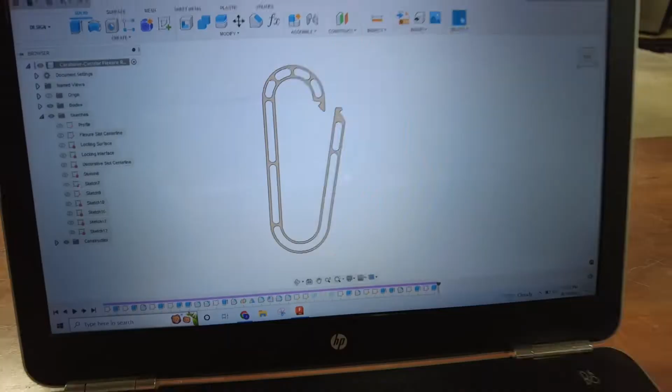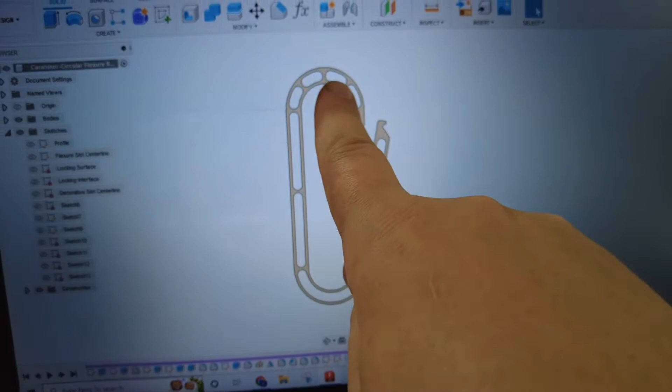And then the big thing is I redesigned my carabiner. So I got rid of the decorative slots that were here and here, and then replaced them with some skeletonization. So now it all kind of has the same design language all the way through. I'm not convinced about the balance. It feels a little top heavy, and I don't know. There might be some little tweaks in the spacing of these. I might take this one and split it into two there, or add a second one down here. I don't know.

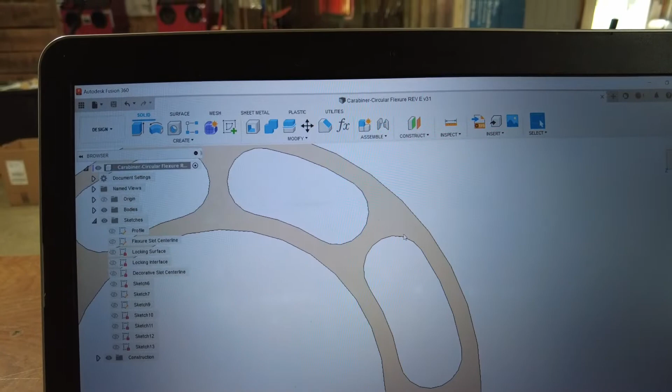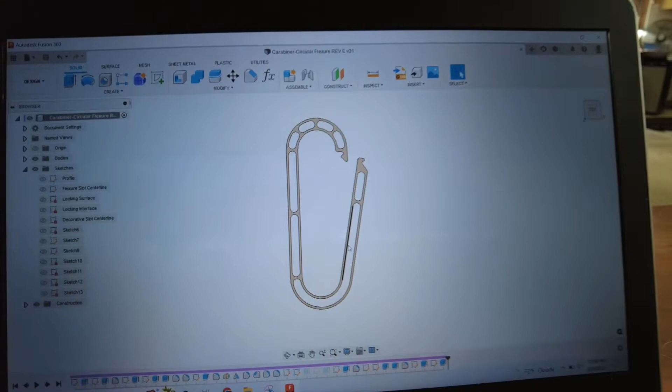But the biggest change is because I don't have that little decorative slot, all of these holes are going all the way through, which means this is now a one operation part, and I don't have to flip it, which is where we were running into a lot of the issues. So I can get twice as many off in one run of the fixture, which is gonna be amazing from a production standpoint. Assuming it works, which the only way to know is to test it. So I guess that's my goal for the rest of today, is to do some actual prototyping.

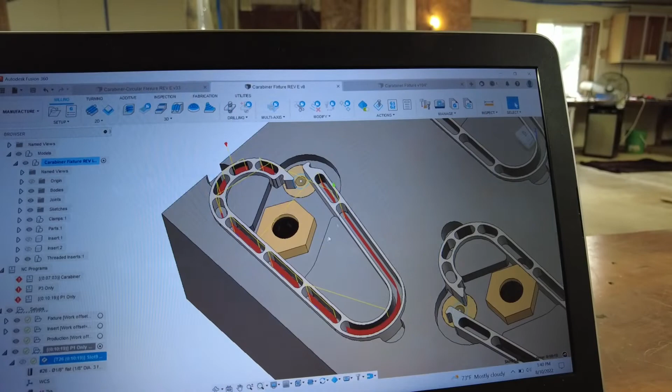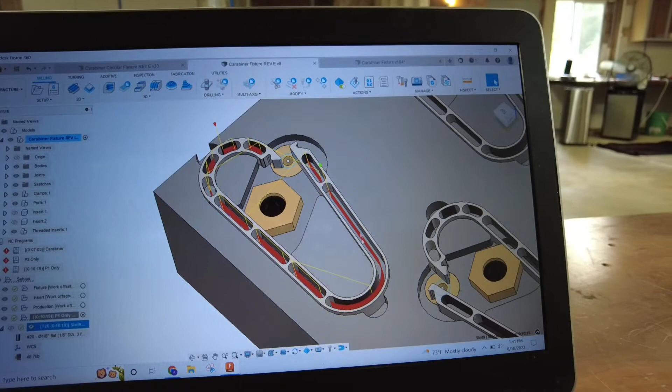I just finished up the CAM for this first operation here—well, the only operation now, since these are one-op parts. Basically it's just a whole lot of titanium slotting. There's nothing fancy going on, and it's exactly one tool path to do this entire part. It's just broken up into all these different slots, but over here on the tree, it's just one tool path to do all of them. I don't know, I'm hoping this will work. I can't predict how the material is going to warp as I cut it, but at least in theory, I like this.

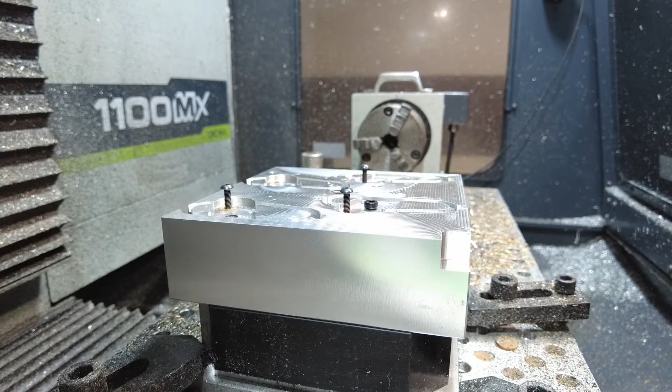So let's just hit go and see if it wants to cut in the right place. If it's trying to cut even remotely closely, then it'll work fine. It'll either be off by a mile or dead on.

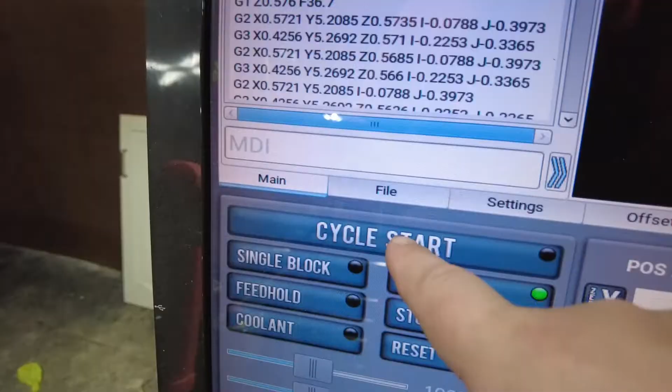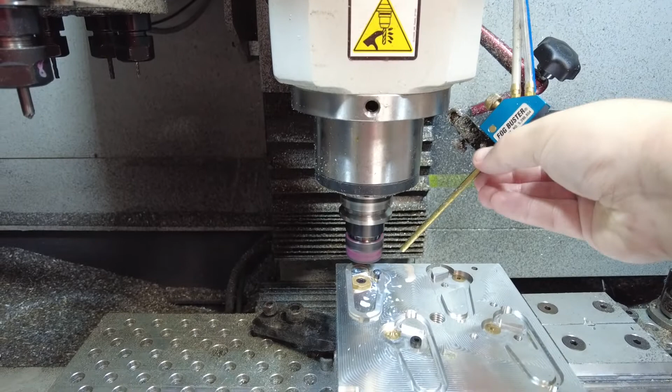I think we're good to hit start. Oh, it's cutting. We're slotting. It seems to be working really well. It sounds really good too.

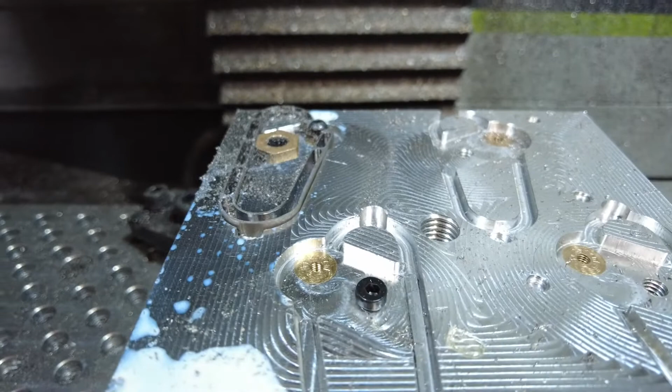It's done. Looks pretty good. Finishes look better than I was getting before, I think thanks to this little hold-down screw. Let's take it out.

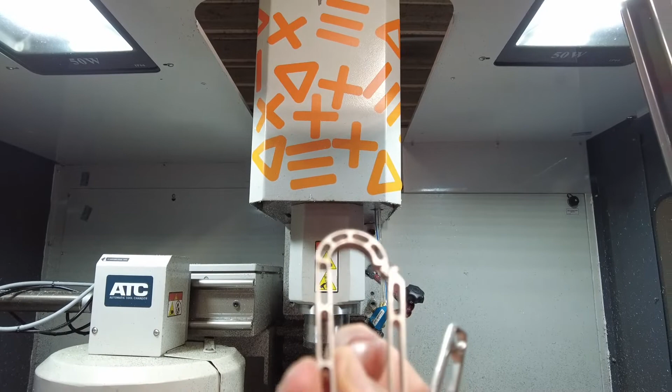Okay, promising. It does not look particularly warped—maybe just a little bit. Oh yeah, there is some weirdness here. Let's see if it works though. Hey, so it works. There is some weirdness in the machining, but this is functional.

It's not quite as stiff as I would like. It's more loose than some of my other ones were, but I can fix that by moving this slot right here, or that rib. It's super lightweight, it weighs nothing. Yeah, some of the machining's not super pretty, but I can deal with that. The biggest issue is it looks like it grabbed the part some right here on this corner. I don't know if I'll ever get a video that shows that, but it does work.

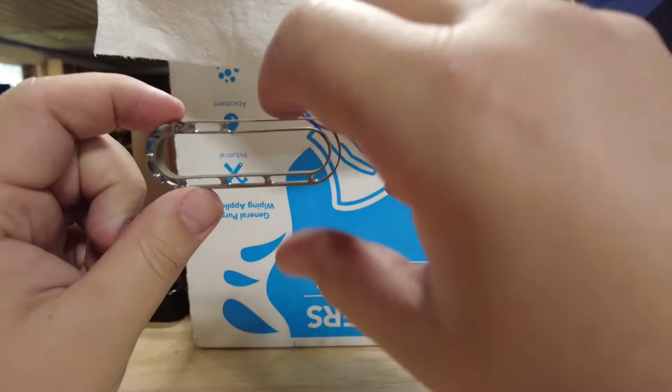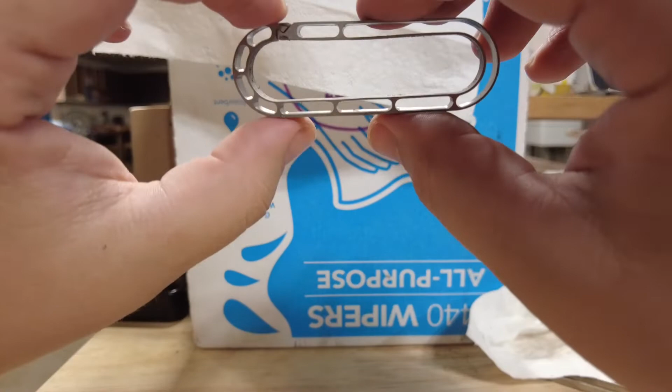Also, this back wall's really thin—oh no, it's just thin right there. Huh, okay, so I need to figure out why that popped up a little bit. This bottom wall is thinner than this top wall. That may be due to the way I'm holding it, and inconsistencies in the thickness of the blank could be causing that, because they are just laser cut.

The top feels stiff, the spine feels stiff, and just the opening mechanism opens. Oh, that is such a relief. I have details to work out, but we're 90% of the way there. This time, at least, I have 24 more attempts to get it right, as opposed to the first time where I only had 5 attempts.

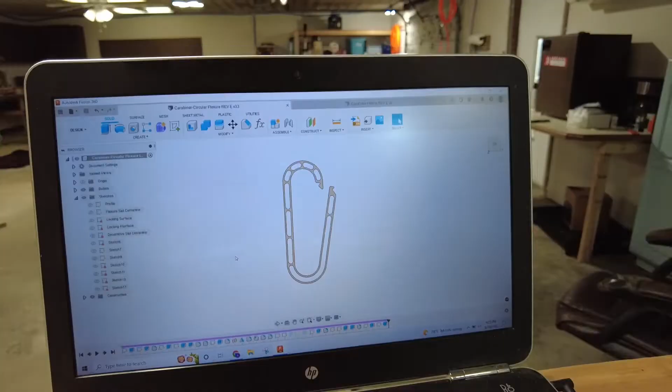So I want to make it just a little bit stiffer. Nice thing is, from my simulations, I know I can do that by moving this little rib right here. If I just move it down, this whole spring gets stiffer. So I'm just going to shift that until I'm happy with how it feels.

Okay, so here's the new design. I pushed that little rib down about, I don't know, 1/8 of an inch or 1/4 inch. And the stiffness—this doesn't really mean anything, but for the same amount of force, it was going back 3/4 of an inch, now it's going back 0.7 of an inch. So there's a 0.05 difference in the amount that this travels when pushing with the same force. I don't know what that difference is going to feel like in practice here, but it shouldn't be nothing.

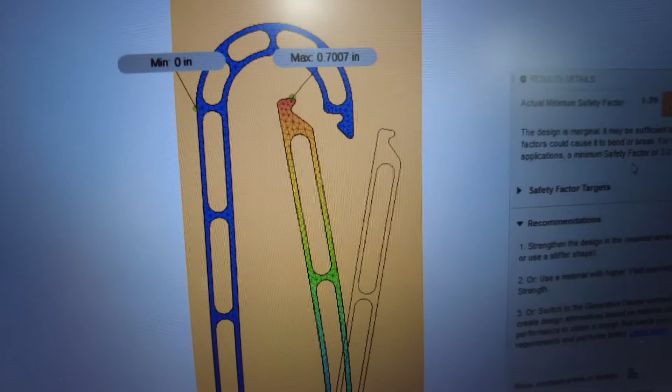The only thing I can really do is test it. So I made the design change. The only other thing I did was back down on my depth of cut by like 20%, just to see if that makes any difference. Otherwise, it's exactly the same.

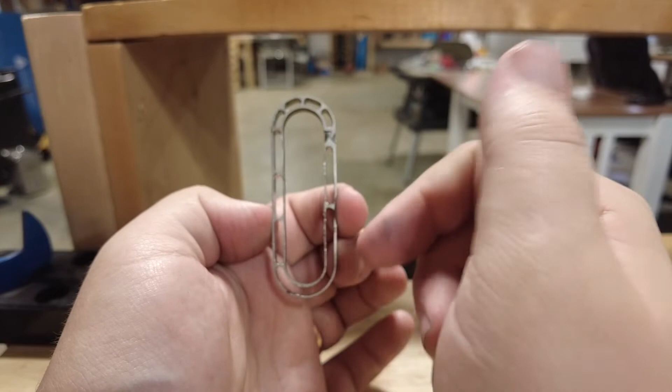Let's see if we did any better this time. The opening force is better—this is a lot more like my original prototypes. I don't have that little weird notch here at the bottom that I got last time, so that's good. The only problem is this inside wall here is really thin, and that's true basically all the way around. Though the top right here is also a little thin.

So maybe my work coordinate system needs to be shifted a little bit, but I think it's more to do with the size of my blank than anything. Let's measure one of these.

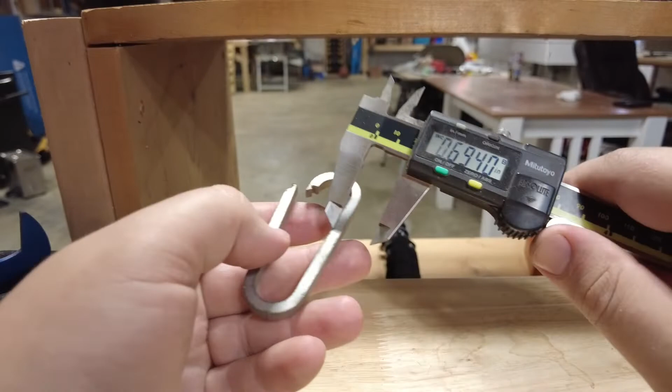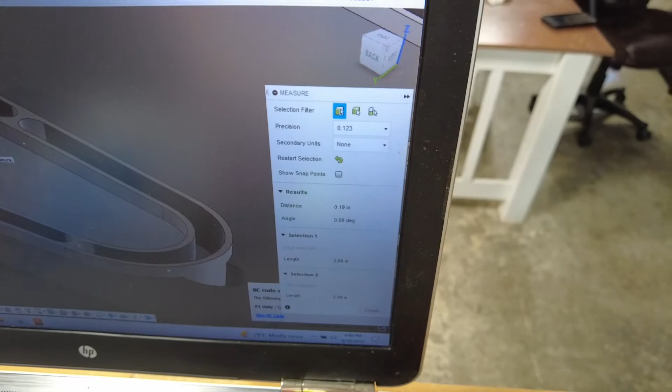Let's see, 183, 185, 183. Okay, and then what does this expect? If we measure this here, it's expecting 190. So yeah, my blanks are too thin. That's what's causing my problems. I just measured 10 random ones. Most of them are right at 183. I didn't find any less than 183, though I found one that was as big as 185. So basically I'm working with between 183 and 185, whereas my CAD says 190.

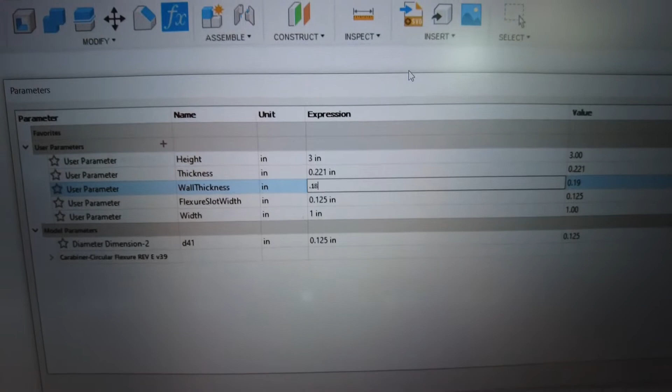So I think I need to shrink my carabiner in CAD so that the computer knows what reality looks like. Now, if I designed everything right, I should be able to just change this number right here to 183 and hit enter. And hopefully this doesn't break my whole carabiner.

It only kind of broke my carabiner. There's literally a piece moved from here to here. Okay, so some more tweaking needs to be involved, but we're close.

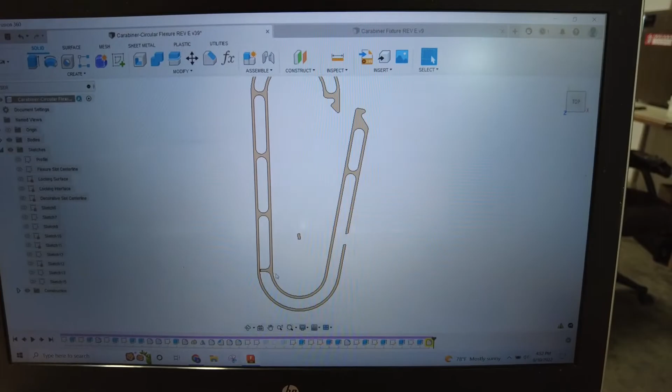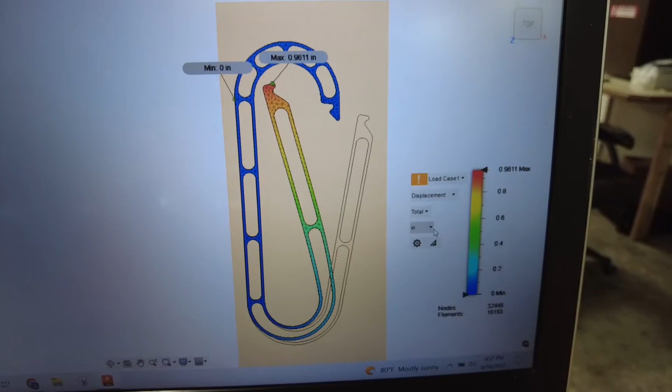So here's something interesting. I made it a little bit stiffer just because I didn't quite like the feeling of it before. And I reran my simulation and it went way farther with the same amount of force. And I think that's because I made the walls thinner, closer to reality, which apparently has a really big effect on the amount of force to open it. So this gets the simulation closer to reality, and it kind of makes sense that it was so easy to open. With those wall sizes dialed in a little bit better, it's more realistic now.

Garbage in, garbage out. There you go, you see that little gap right there? That's accounting for the change in wall thickness.

I'm about ready to run it again. The only machining change I made on this was that I forced it to machine this big pocket right here, the hinge pocket, before it goes and does all the little pockets. This is where the fixture has the least rigidity, so I want to do that first before I remove this other material here.

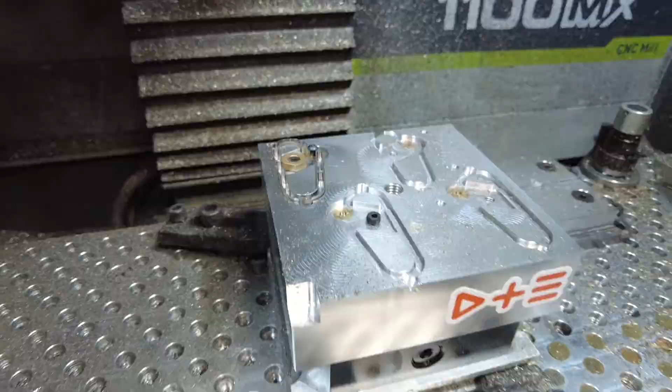Prototype number 3 for today, number 8 total. Let's see how it works. So this one's getting pretty darn close, though I think this one warped a little bit where the other ones didn't. I don't know why that happened. Some of those slots are a little bit offset. The bottommost wall seems thin, and the topmost wall also seems thin. I don't know what that's about. Otherwise, we're looking pretty good.

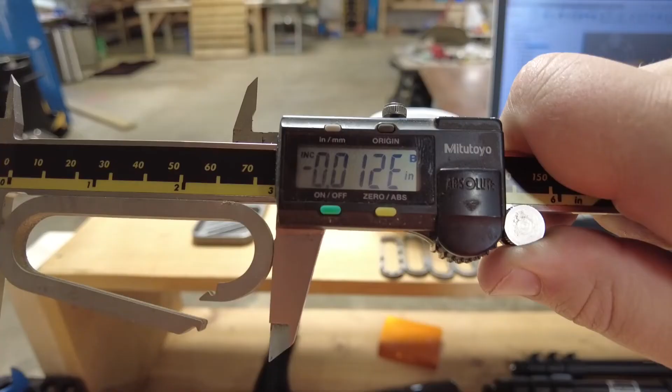So the next thing I learned is that these are all between 10 and 12 thou too short in this dimension, so I need to account for that in my 3D model as well. That explains why the top wall and the bottom wall are too thin. And that change breaks my whole model.

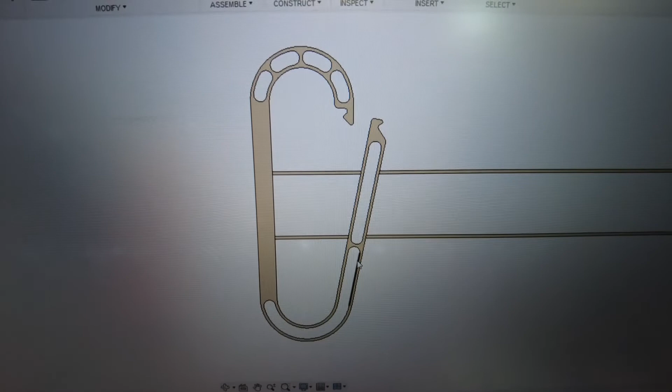Well, I suppose this is an improvement. It's the right height now. This is definitely not the best modeled model that I've ever made. Closer? There's another one. This one is really, really close.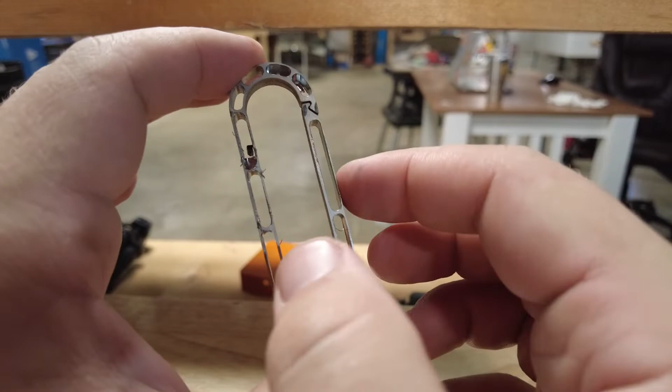The top wall here is still very thin. The bottom, however, looks fine. And then also the right side wall here and here are very thin for some reason. And again, we have a little bit of warping there, so it doesn't quite lock up right. But we're getting close. Don't know what happened here or how to fix it, but I don't know.

It's closer at least. I sandblasted this prototype so I could get a better look. There were just some minor burrs and stuff on there that I wanted to get off. I'm not quite sure what the problem is right now. I think I'm going to take a minute and look at this one and measure and see what I can figure out. But I'll do that off camera and we'll revisit this later.